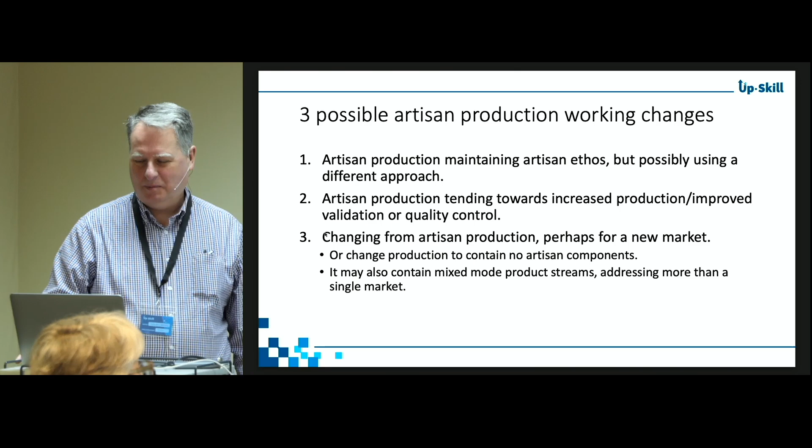So in our case studies, in several of the following examples, the developments have changed from a traditional approach. It doesn't mean that either is right or wrong, they're just a different method. In most cases, the proposals were harmonious, symbiotic, extending capability, upskilling the workforce, and their working relations.

The following slides show the concepts considered. The company names have been changed to protect the innocent and stop Torsten suing me. And there are only 4 examples of our 9 case studies.

So these are they. The left-hand column clusters, so we've got Milan, UK and Germany, then the company where the names have been changed, and then the technology where they're working in: smoking equipment, writing equipment, brass wind instruments, and flame burner technologies.

So in the first case, which is GoldenBriar, they are making pipes from briar wood. It takes 5 years to dry, 2 months of production, 90 production steps.

And they were looking at implementing CNC production, possibly linked to vision systems, so that people could dial in and see their product being made live real time. They also wanted to offer customers the opportunity to modify STL files, CAD files, to input into their own product and turn it into a particular bespoke offering for them.

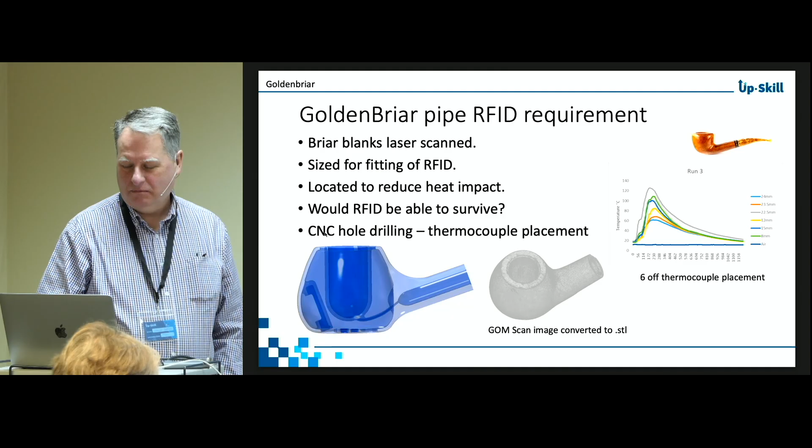So that was changed. We couldn't progress with that any further. So then the notion was proposed, well, can we put some identify marking on the pipe that would verify instead of an RFID? So if we had something like a QR code, that's the kind of data format of a QR code.

The various areas that do the programming side of things, but could we build that into the surface texture of the pipe, possibly using perfect circles, because we can machine circles. It's much harder to machine squares, so it's never going to be the same as a QR code, but could we embed data in the surface?

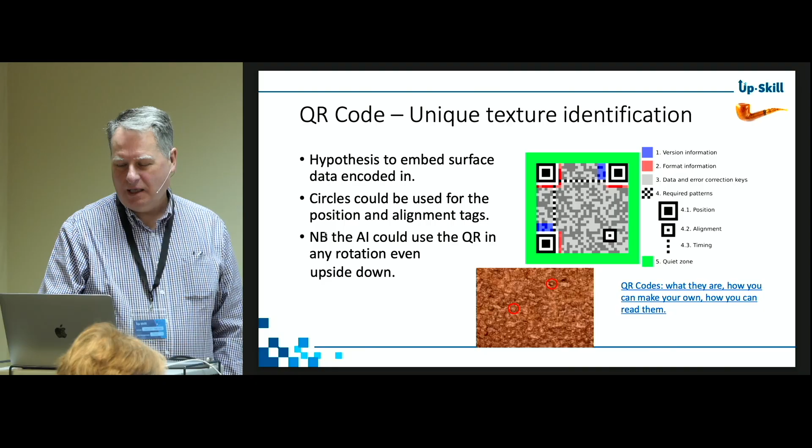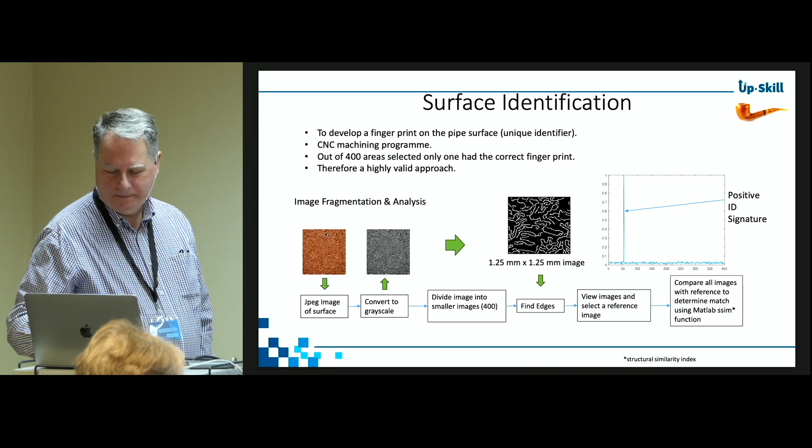Going back to that process, going back to that picture - this algorithm can build the texture and build extra code into that data.

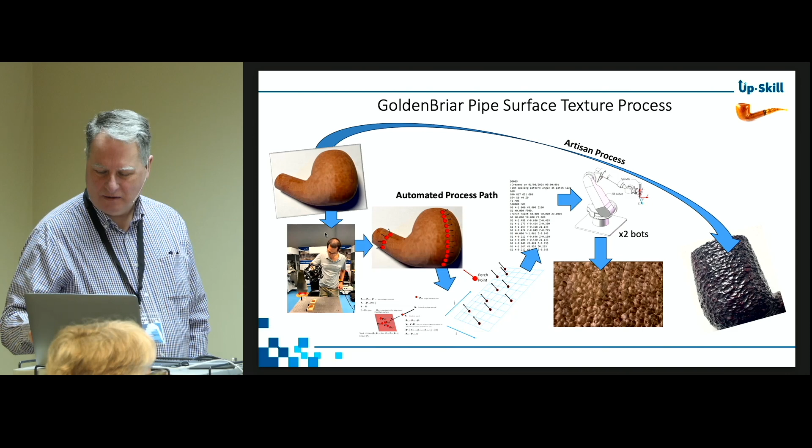By the time the surfacing concept was available, the pipe company had positioned itself closely with the Chinese markets and therefore didn't see such an issue with the RFID any further.

But they were interested in the CNC machining of the briars, which had been considered by 2 robotic handling machines - one holds the briar and the other textures the outside.

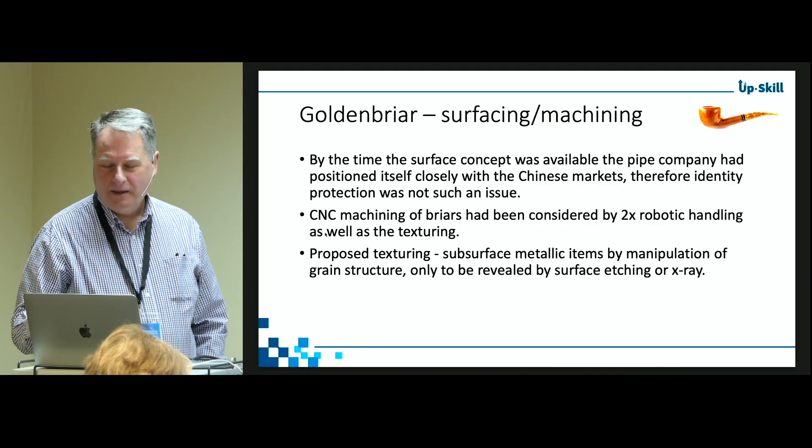There's a proposal that we could also do this on metallic surfaces where the surface is not ground, but we use laser to manipulate the grain structure of the metal to embed a detail that can't be seen by the eye, but only revealed by surface etching or an X-ray. That could be a really important finding for the project.

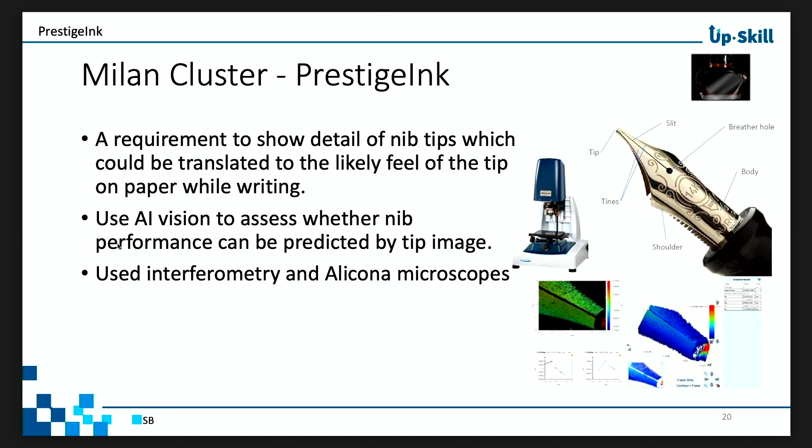In the next case, PrestigeInk, we can see a nib and the nib tips. We were looking at a way of identifying whether a nib could be imaged to determine whether it was going to write nicely. One of the tests for the company was to use paper and write on it - does it feel scratchy? Does it flow smoothly? That would determine whether that nib went on to the next stage in the process.

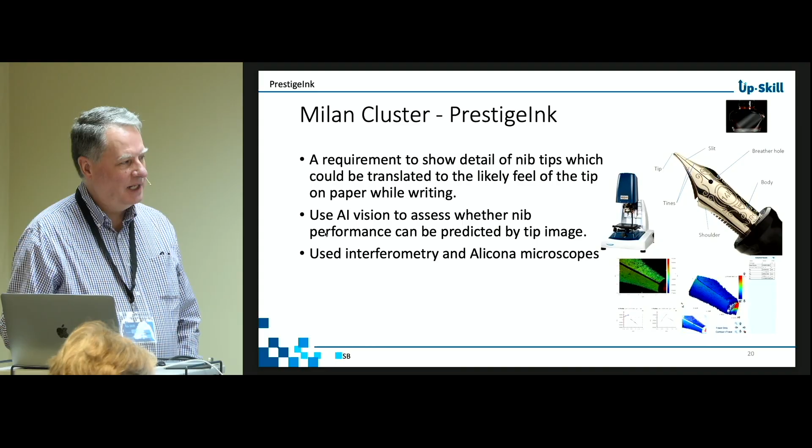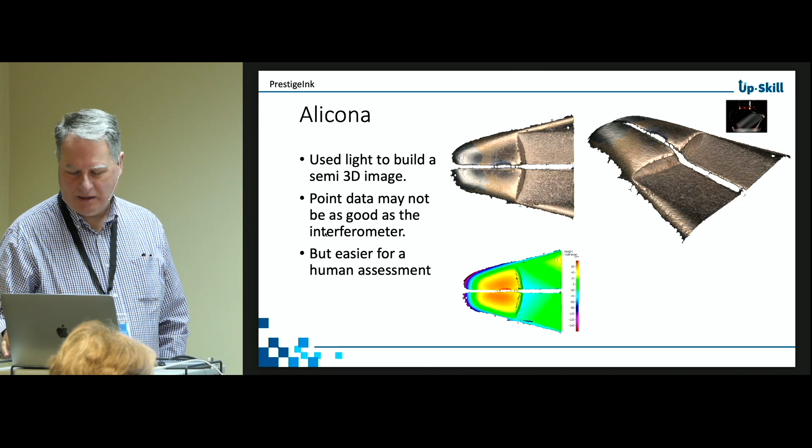We're using interferometry and Alicona microscopes to do this. This is a picture of an Alicona microscope image of the tip. It's built through light layering to map a 3D image, which gives you a height profile. It's easy for an operator to see the complexity of the surface and whether it's got any digs in it - easy for human visual assessment.

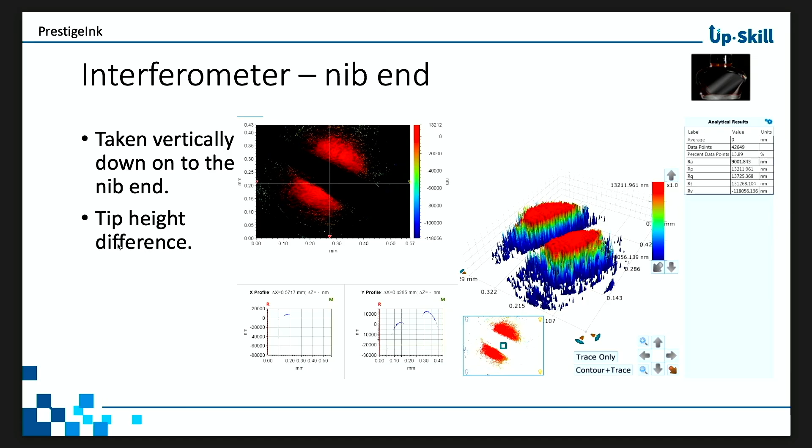This is an interferometer picture looking at the nib end on. What we can see from this smattering of data points is that the nib heights are not the same. Therefore, this nib is going to be more scratchy than ones that have nibs that are the same height.

This is using the interferometer again to look along a barrel - the barrel of the pen. It's shown in green, with these micro digs in the surface. This picture shows that the barrel is generally barrel shaped, and this one shows significant digs in the surface. These digs can then be conceptualized and extracted from that data to say this wouldn't pass a quality control assessment.

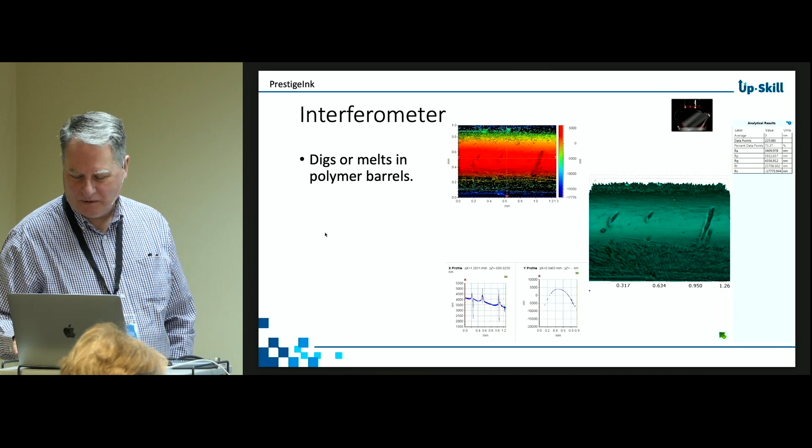In this version, these are high-end barrels, incredibly expensive to machine, but there can be errors incorporated in the pattern as the tool wears. So the Alicona microscope has created an output - a picture which is a height map, and the height map is then determined by the software.

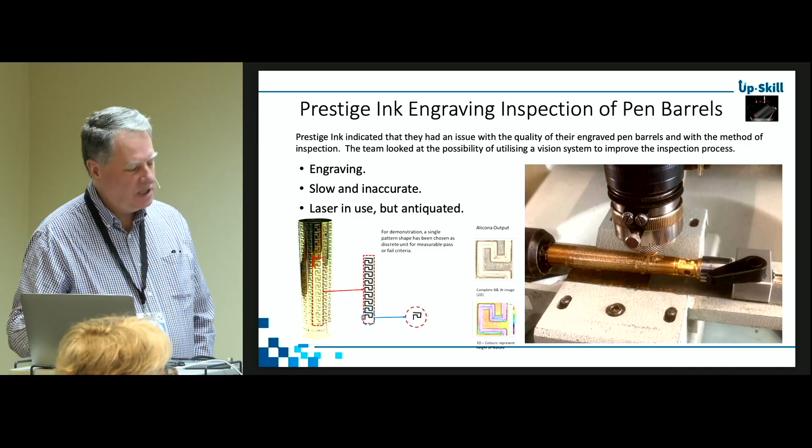We also saw that they had used laser engraving, but weren't using it in this case. Laser engraving would be a much better approach than this machining method, because machining was giving such a high rejection rate. So we proposed a method of testing barrels, whether they're the machined ones or the polymer versions.

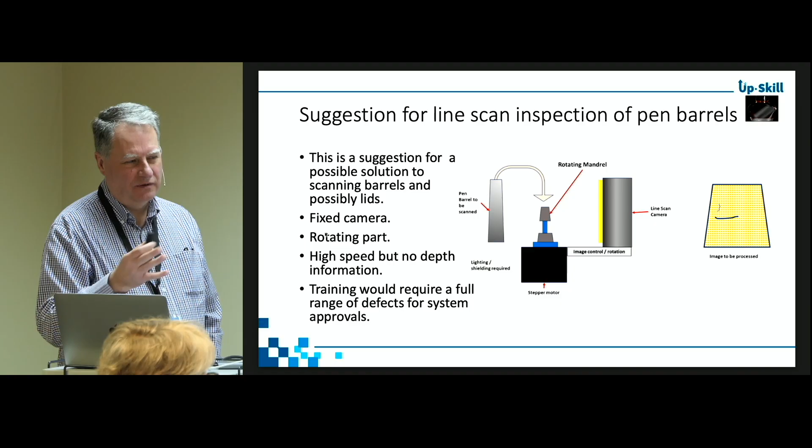The barrel is placed over a mandrel with a stepper motor, and a line scanner looks at what's happening on the surface, numerically controlling what data it sees to form a pass or reject scenario.

In this version, which is a Cornet company, we were looking at producing or trying to redesign all of this and many parts of the Cornet in particular.

In this first case is the insert valve, which goes in this body. There are 3 insert valves, and they're all different, all taking sound or passing air in a different way to make the sound.

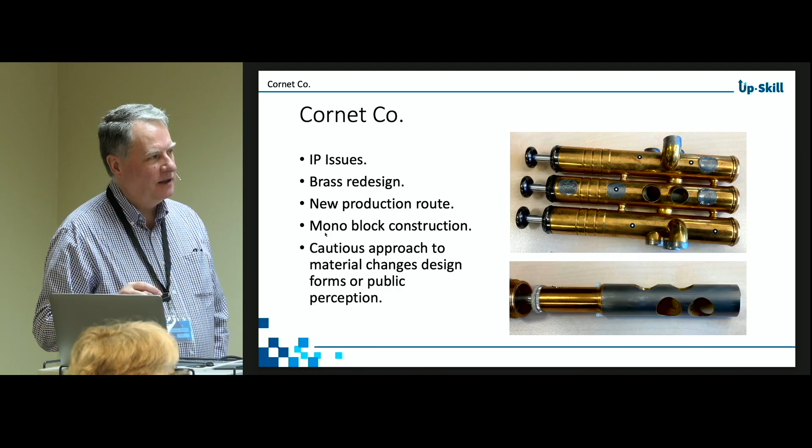We're also looking at converting this to be machined from a monoblock piece of brass, rather than being made up of 19 different parts which are brazed together and later soldered together.

So we were trying to develop this. There's lots of complexities in these parts. These are hand assembled, so to get rid of the hand assembly and make it one part, we could print by stereolithography. That was printed in polymer to trial in the musical instrument.

There were positives and negatives of using the polymer. It's very lightweight and low cost compared to the manufacturing, much lower cost. The airflow was good, but the feel in the instrument was bad, because it was so lightweight that the response was very fast, different from the original processing conditions, which was perceived by musical players as a negative.

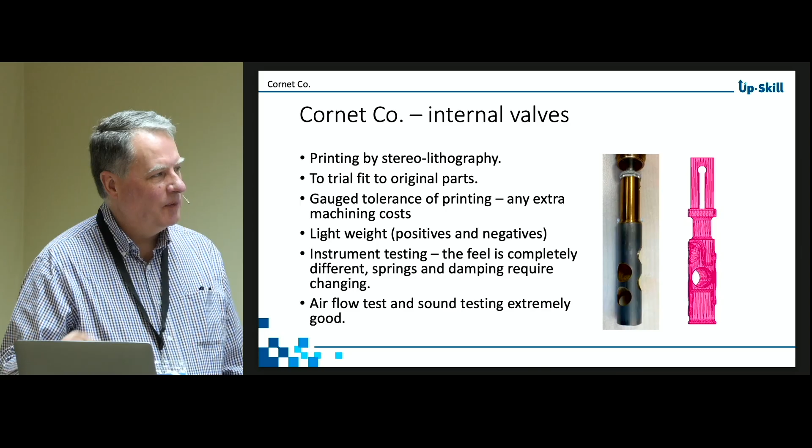There would be opportunity to balance that with different spring responses. We also tested printing in lots of different types of polymer, in the UK and in China, looking for cost comparisons and material advantages. We also redesigned the Cornet overall, so it could be made with lead-free solder for the first time, and also to use mechanical fixings for ease of repair.

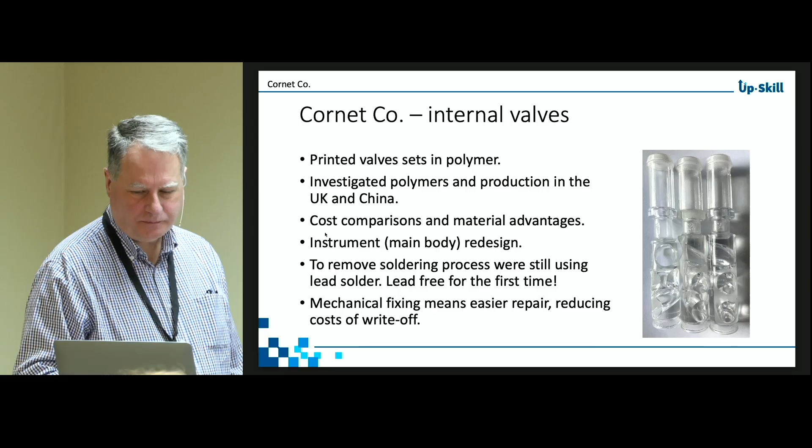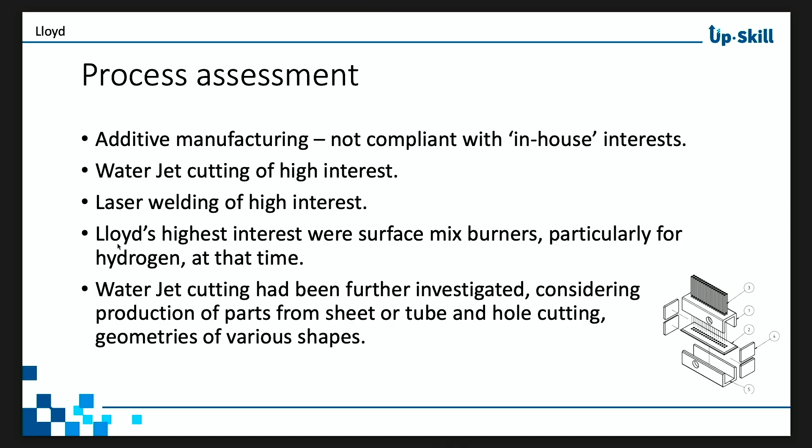So in this case, we were looking at burner technologies for Lloyd. We can see in the breakout image a burner developed for the project, which is a hydrogen burner, essentially a surface mix burner.

Lloyd wanted to investigate additive manufacturing, which is 3D printing in metal. But when they saw the scale of the plant and the complexity, that became a no. What was of interest was water jet cutting. We did lots of trials in water jet cutting, laser processing, laser cutting, laser welding, and these were of particular interest for making hydrogen burners. So that's what we took forward and did much investigation around.

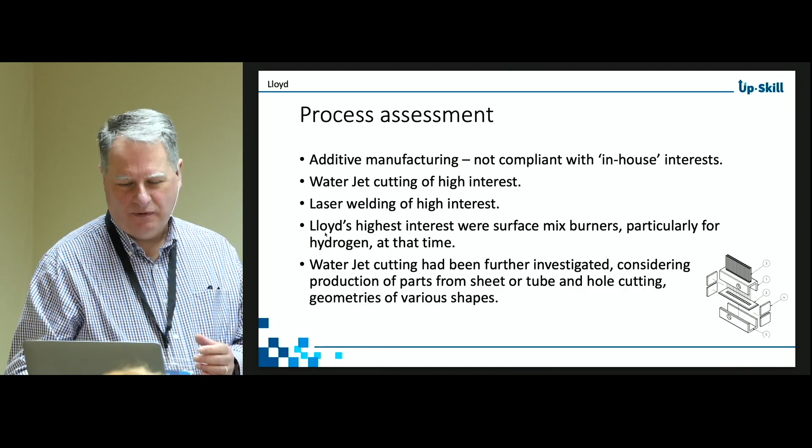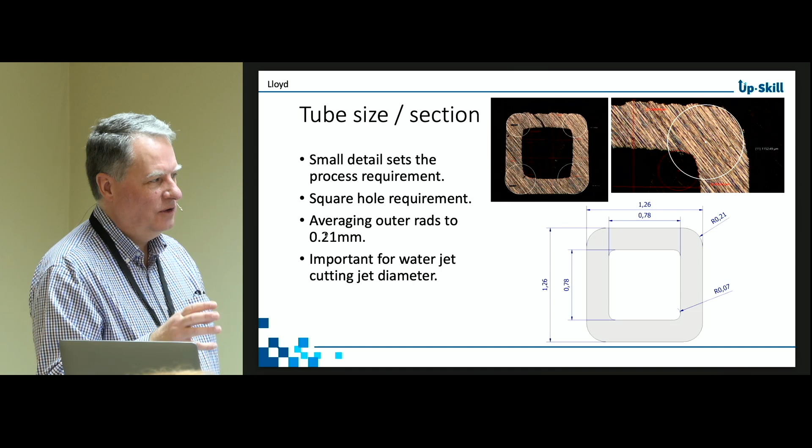But how do we start? We started with the finest detail we'd have to look at, which was processing the square tubes that go into making the hydrogen burners, with an average radius of 0.2 millimeters. Could the water jet cutter actually achieve this?

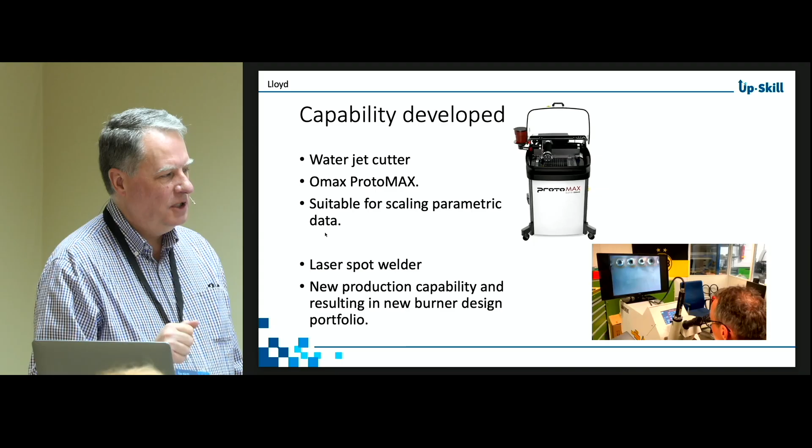So in the end, Lloyd bought this Omax water jet cutter, a much smaller version than ours. They also bought a laser spot welder, giving them a new technology to make burners in a different way. With the new design processes and processing conditions possible, we were able to use round tubes instead of square tubes, which was a massive cost reduction.

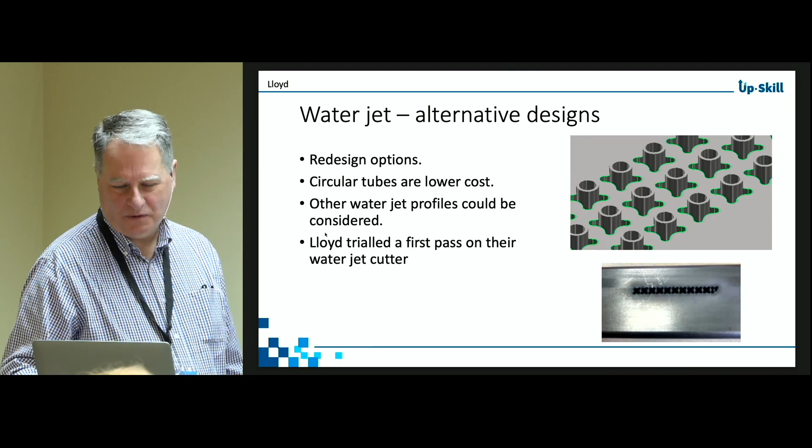We also did a bit of robotic braze pasting, which led on to trials with vacuum furnace processing, which was an incredibly good technology. We start from having a component with high oxide layers, and when it's processed in the furnace, all the oxide layers are removed, giving a perfect braze component as well.

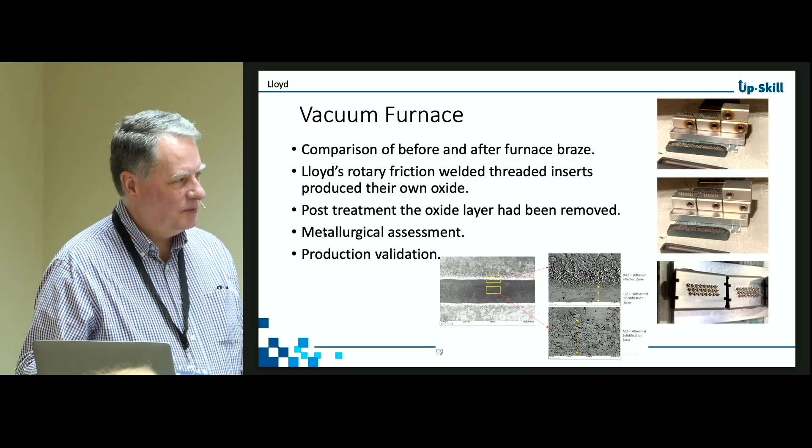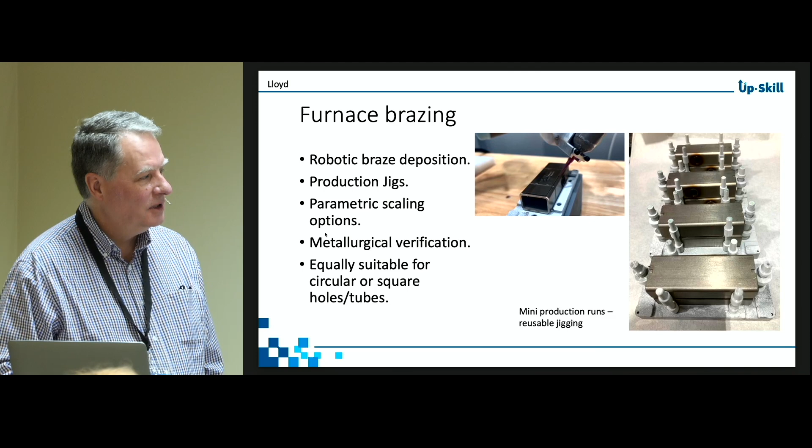Metallurgical assessments were done, which also validated the production process. In this top picture, we can see the robot applying a braze paste, and these are our production jigs that we used in mini production runs to validate the assembly processes.

So in our product placement, there are three possible artisan production types, as mentioned at the start. In number one, we've got Golden Briar and the Cornet company for their high cost versions, which are lower sales. In number three, Cornet Co. with their lower cost versions, which are more mass market sales. And in the middle, PrestigeInk and Lloyd.

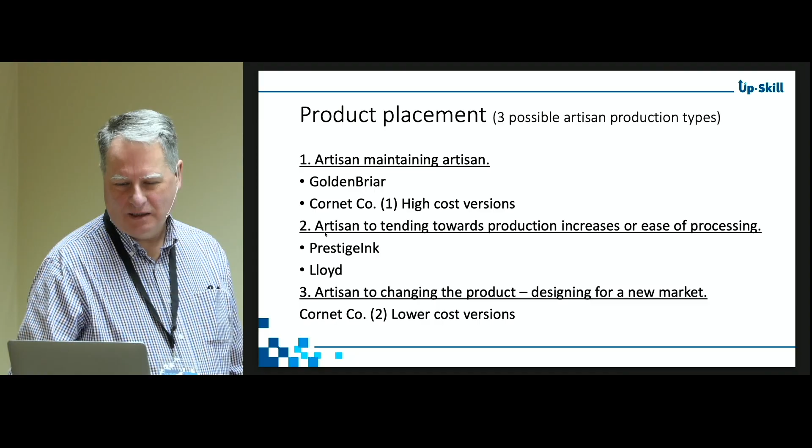So the lessons learned then, the findings for Golden Briar: it was a fantastic technology that could assist the technology scale up. And with PrestigeInk, high visual quality assurance, product improvements and automation processes could really have helped their company.

Cornet Co., we've looked at new models, expansion of global markets, elimination of lead, and investigated machining with 7-axis machines. For Lloyd, the options were the finished quality of the upgrades, a parametric design, looking at a single torch design through computer-aided manufacturing, which could be easily scaled.

So the findings and ethnographic influences: the ethnographic insights revealed that a successful transition to Industry 5 in manufacturing is not just an adoption of new manufacturing technologies, but equipping the managers with the skills to understand and support and collaborate with their workforce. Managers and directors play a pivotal role in aligning the technological changes with the company's craftsmanship values and long-term goals. By investing in managerial training and emphasizing human-centered practices, companies can achieve a balance between digital innovation and traditional skills.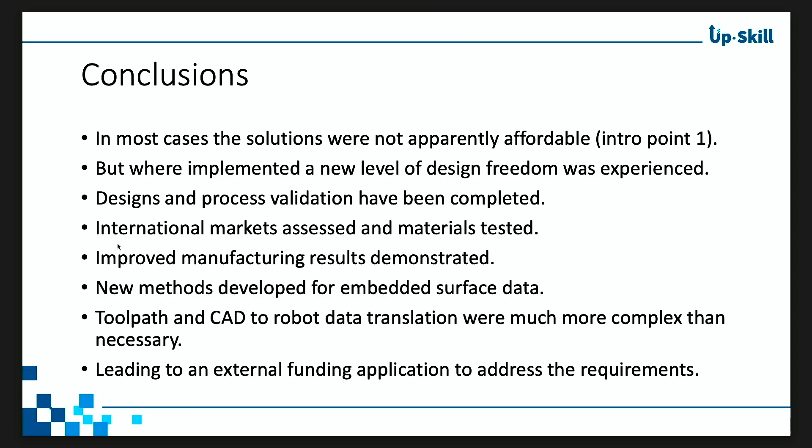In most cases, the solutions were not apparently affordable, as per our intro point, but where implemented, a new level of design freedom was experienced. The designs and process validations have been completed, international markets assessed and materials tested, improved manufacturing results demonstrated, new methods developed for embedding surface data. Toolpath and CAD to robot data translation were much more complicated than necessary, leading to an external funding application to address the requirements. Thank you.

Yeah, so when I said we were working with engineers, I really meant it. Right? So, questions for Stephen?

You insisted that managers needed to have this capability to work with workers and those kind of things, but that was not really apparent from your story. So maybe you have some examples how that worked?

So I can tell you some of the negatives of where that was applied. In some cases it was very apparent that people wanted to implement new technology for the removal of roles, but where companies were looking to augment technology for the benefit of their people, their outlook is much better.